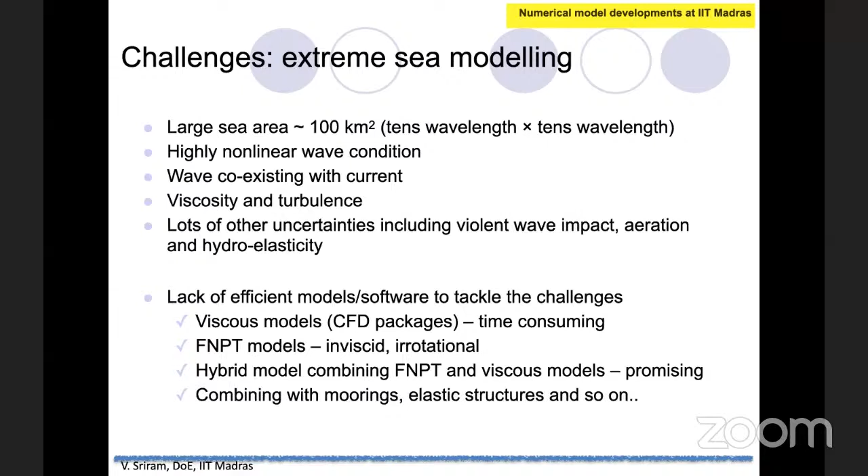In this entire talk, we will try to cover the last three parts: the FNPT model, the hybrid model, and the coupling with mooring line tension as well as elastic structure interaction. So in general, when we talk about fully nonlinear waves and violent wave and structure interaction, we have different classes of numerical models.

Depending upon the method, we call this a mesh-based method or a mesh-free method. Mesh-free methods are recently quite popular for modeling the wave structure interaction process. In the potential flow solver, traditionally people have used boundary element method, and we can also use finite element method.

One important thing in a numerical tool, whenever you try to develop it, is it has to handle both small waves as well as steep waves, because most commercial code may not be able to handle small waves in the wave structure interaction process, because there will be a lot of damping and numerical dissipation and so on and so forth.

It also has to capture the splash up or plunging of the waves along with the structure interaction, whether the structure is rigid or a floating rigid structure, or elastic structure interaction.

More importantly, for industry perspective—because after my PhD I worked in industry—when we tried to do it there, they need it to be computationally efficient as well as faster. The simulation has to take very less computational time. So that is one thing we have to look into whenever we want a numerical tool.

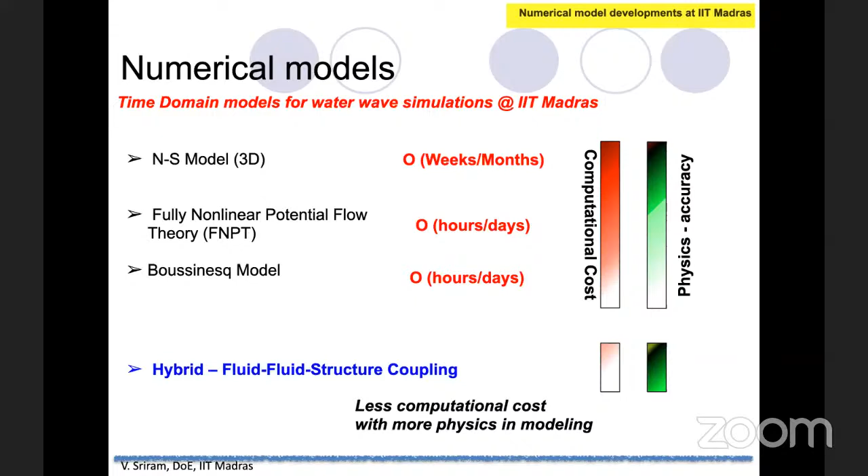In this slide, I'm not going to go into the equations part of it. As I told you in the beginning, I will just try to show the application of the developed model for the different approaches which we have developed.

The first one I will show is the mesh-free method. So what is a mesh-free method? People might know about finite element or finite difference, which are mesh-based methods, whereas mesh-free means we are basically trying to deal only with nodes or particles—there is no need of any mesh. So is it a new thing? No, it's not new.

It basically exists ever since the Taylor series exists. So the advantage of this mesh-free method is it has...

Because the finite element or finite volume method needs a high cost in creating the mesh, as well as automatic meshing when you want to do a dynamic mesh simulation. It also has low accuracy of the stresses, because the derivative term will be less accurate in the case of finite element, and there will be discontinuities at the element. So these are all the issues in the mesh-based methods.

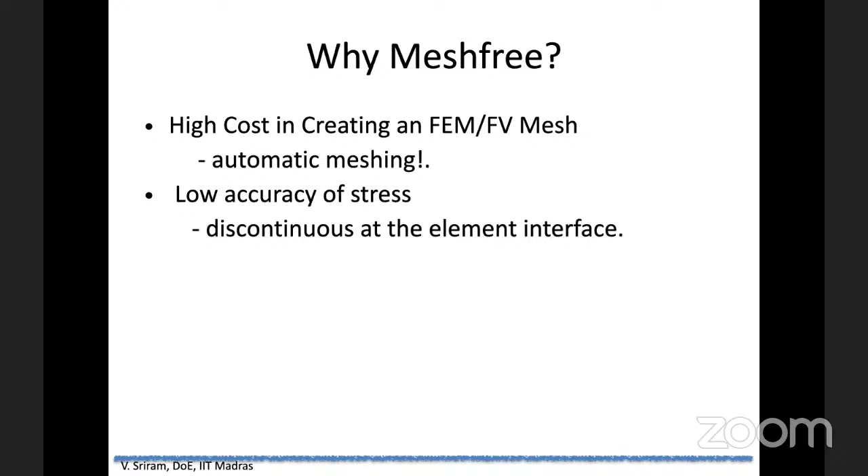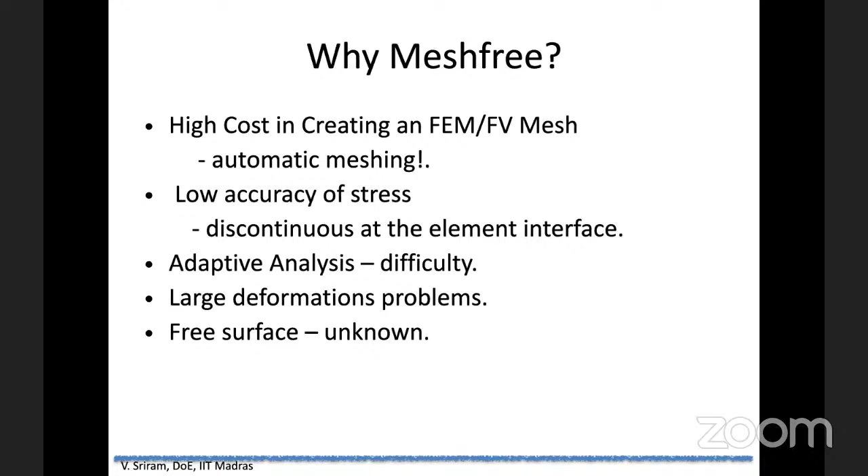And of course, adapting to the dynamic mesh as well as the time stepping is challenging in the case of mesh-based methods. And if you want to deal with a very large deformation problem, again, the mesh has to be properly refined. One of the major issues, in particular in ocean engineering, is the free surface, which is unknown - we have to find the free surface during the simulation itself.

So what is this mesh-free method? What is this particle-based method? This is the only slide which I have the equations, but what is this particle-based method? The particle-based method exists ever since the Taylor series expansion exists.

But the issue is, if you might have used the one-dimensional Taylor series - you might have studied this in higher secondary school itself - you basically get the forward difference or backward difference and so on by using the Taylor series. But one of the constraints in a one-dimensional Taylor series is the path. That means it has to go in only one direction.

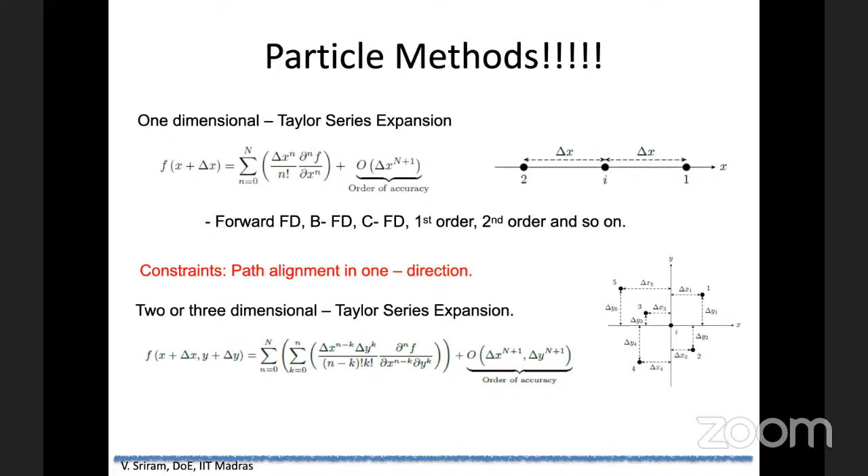But how about two-dimensional or three-dimensional Taylor series? Of course, yes, you can use a two-dimensional or three-dimensional Taylor series. The advantage with the two-dimensional, three-dimensional is, if you want to define a point, it's enough if you know the X, Y, and Z coordinate system. That means you don't need any mesh at all - you just need to know the X, Y, and Z coordinate system, and then you can solve this.

Suppose if you want 5 derivatives, you have to pick 5 points, and then you have 5 equations, and you can solve for the 5 unknowns. The advantage is it has no path constraint, but the disadvantage is it needs more nodes for the cross derivative terms, and in particular it leads to an ill-conditioned matrix.

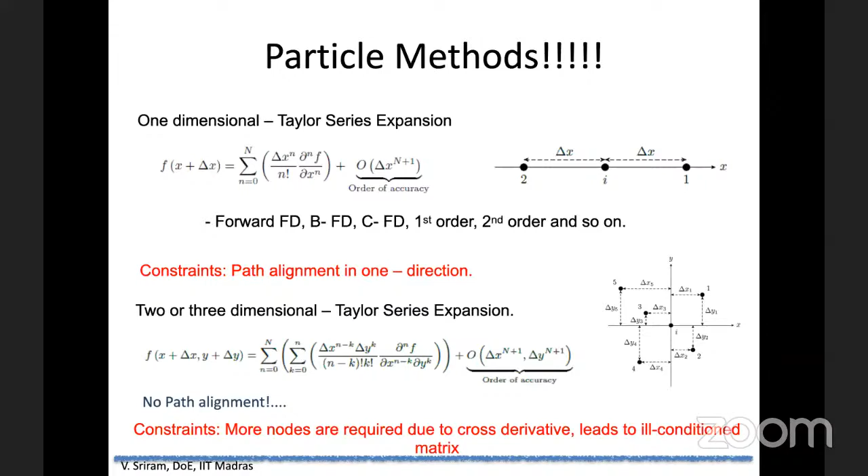That is the reason people, before 40 years, because the computation power was not that much, had not tried and improved these two-dimensional, three-dimensional Taylor series expansions. So nowadays, in the last 2 decades, because of computational power, people try to improve upon this method, which leads to the particle-based method. So most of the particle-based methods which exist as of now can be derived, or re-derived, just by using a Taylor series expansion.

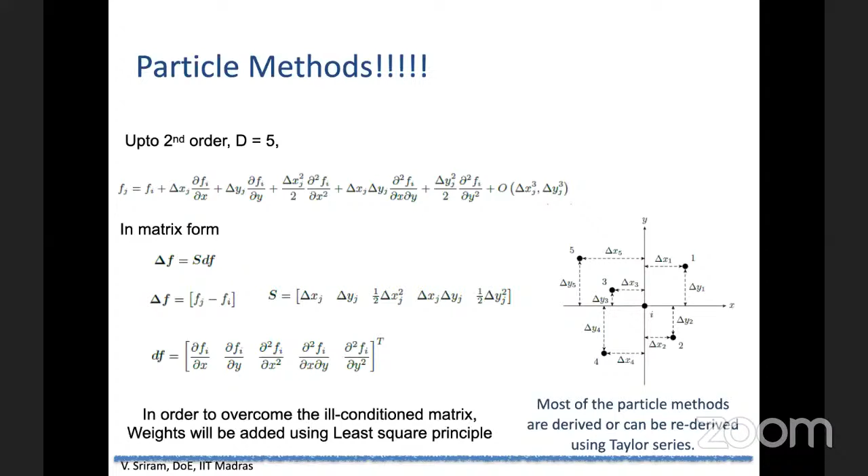So that is all about the particle-based method. Why is there a mesh-free method? Because the two-dimensional Taylor series itself is a mesh-free scheme. So the one scheme which we are trying to work on for the last 15 years is the meshless local Petrov-Galerkin method.

If you are familiar with finite element, you might have heard about the Galerkin scheme. The Petrov-Galerkin, in the sense, both the test and trial function will be in different functional spaces. And the local means we are trying to deal with the local subdomain instead of trying to do the entire global domain. And meshless, in the sense, there is no need of any mesh in this particular method.

There is an improvement which we have made in this particular meshless local Petrov-Galerkin scheme, for the velocity as well as for updating the coordinate system. This has been developed for the past 15 years, and we have applied it to a wide variety of problems. Recently we came up with a review paper on this particular MLPG, particularly the developments and its applications in the ocean engineering context.

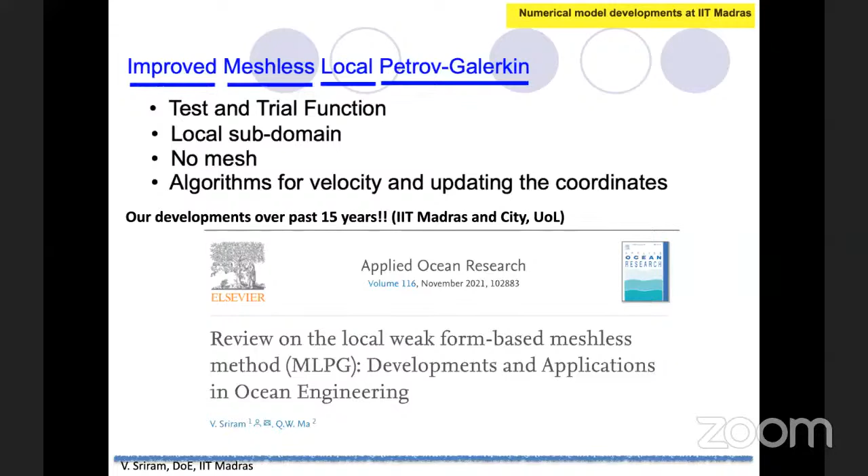Wherein we detail each and every algorithm, and discuss the pros and cons of these algorithms, and compare it with the traditional smoothed particle hydrodynamics, which is another class of particle-based method. I'm not going to deal with any of the equations because of the audience - I will just try to focus on the application of it. So we try to develop this particle-based method. Some of the applications which we have applied this model to is the sloshing problem.

It's a two-dimensional tank, as well as for the wave overtopping on a structure or the wave breaking on a simple slope. So this is for typical two-dimensional test cases that people normally do whenever they try to develop any numerical scheme. And we also extended this two-dimensional model for wave breaking interaction with

wave breaking interaction with the elastic plate. So whenever there is a plate, a vertical wall or such, it is going to have an impact, and then the plate is going to vibrate. So this entire process has been captured by using a

two-dimensional model, wherein we have particles which are coming and hitting an elastic membrane, and the elastic membrane is going to bend. So you have to solve the elastic structure interaction, the traditional Euler-Bernoulli equation based on finite element, as well as we solve the fluid based on the meshless local Petrov-Galerkin scheme.

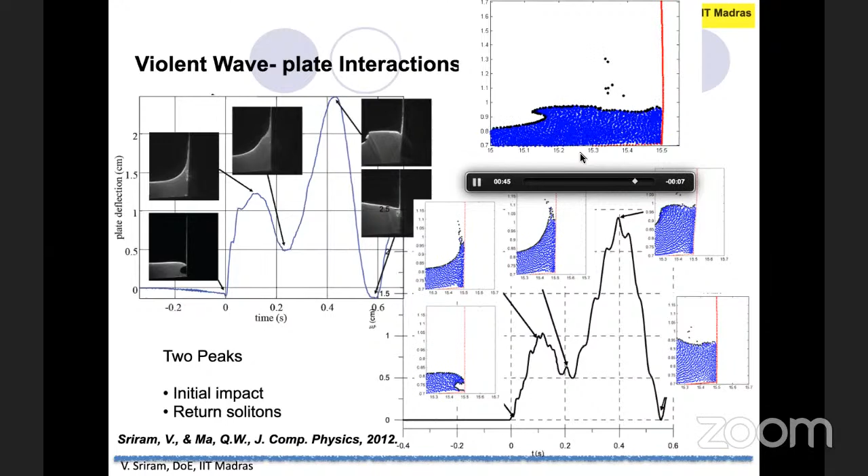And we try to understand how it basically compares with the experimental measurement. So we had a comparison with the experiments as well as the numerical model. The one which is on the left-hand side is an experiment, and the one which is on the right-hand side is a numerical comparison between the two things. And this is for two-dimensional. So first I will just show the two-dimensional applications, then I will go to the three-dimensional application.

So another application which we considered is about the porous structure interaction. Normally for modeling any rubble mound breakwaters or stones, we consider it as a wave porous structure interaction. There are two ways of modeling. One is by using a microscopic approach.

That means you model each of the rigid bodies. So that is currently what we are working on, wherein the computation time will be very much expensive. And the other one is a macroscopic approach, wherein we try to model this porous medium also as a fluid, but by including the Darcy velocities and all those additional terms which come from the empirical formulas.

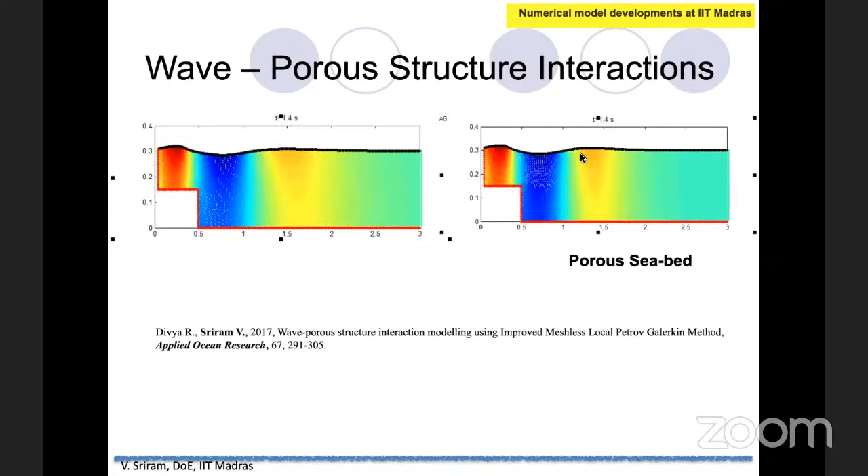So this is one of the applications wherein we extended it to the wave porous structure interaction, as well as we extended it to the wave vegetation interaction, which is one of the recent approaches due to climate change adaptation, for how to protect the coast based on vegetation. So we extended it for two-dimensional. Of course, we do have a three-dimensional model for the same thing, showing how the vegetation is going to influence the damping characteristics of it. So this is another application of this particle-based method.

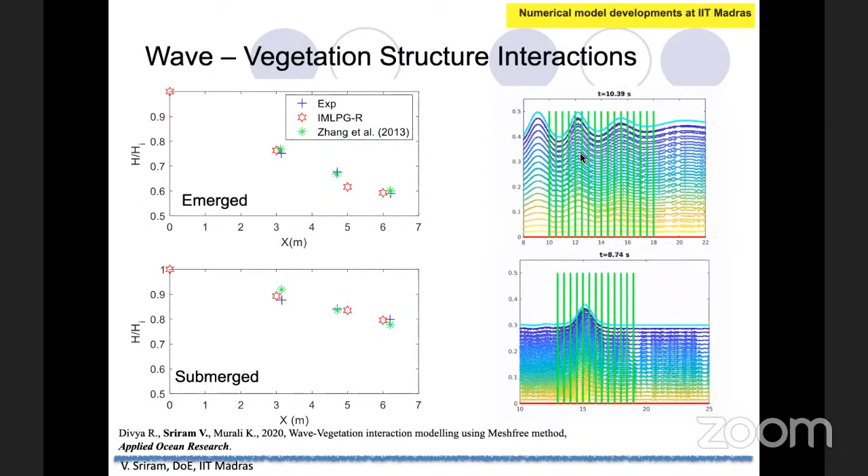And then, of course, we applied it to floating bodies, typical monohull as well as twin hull. This is for forced motion, and we tried to use the particle-based method. One of the issues with the particle-based method is that it cannot handle variable resolution like in a mesh-based scheme, because of the algorithms which we use.

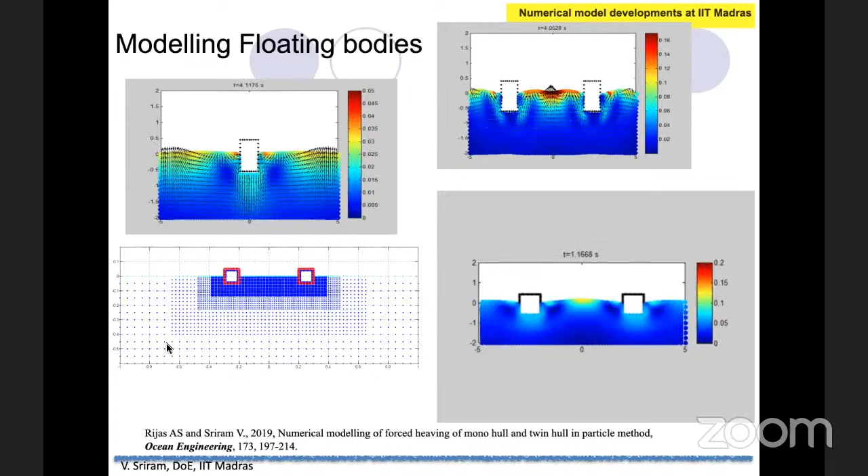So in recent years, we tried to improve upon this particular algorithm so that you can adapt it for a gradient mesh, like in mesh-based schemes. So that is one of the advantages which we have recently focused on when modeling floating bodies. And the advantage with this is we can reduce the computational time drastically.

Of course, everybody knows that near the body, we will try to have a finer mesh resolution, and far away from the body, we will try to have a coarser mesh resolution. Then you can reduce the computational time as well as the number of nodes required to capture the particular physics involved in it.

And then, of course, we applied it for a simple free decay test as well as for a roll motion of a box, wherein some traditional experiments are available to compare with the test cases. And then we also applied it for a floating body response, this is for two-dimensional, and then I will show you the three-dimensional in the coming slides.

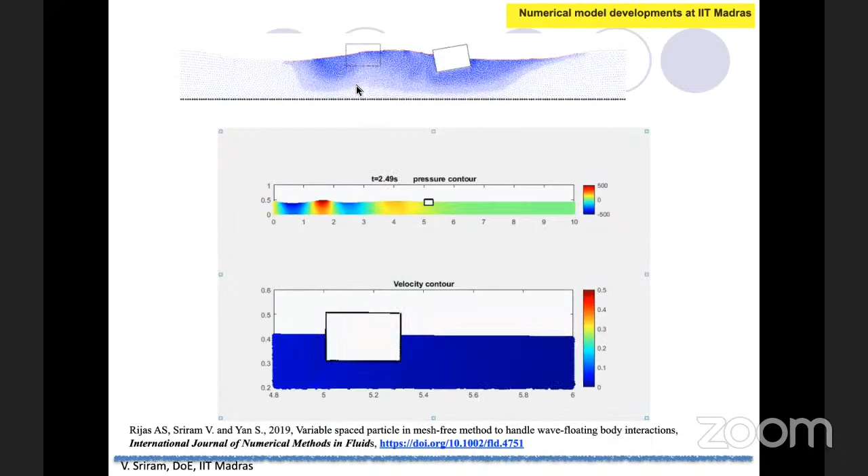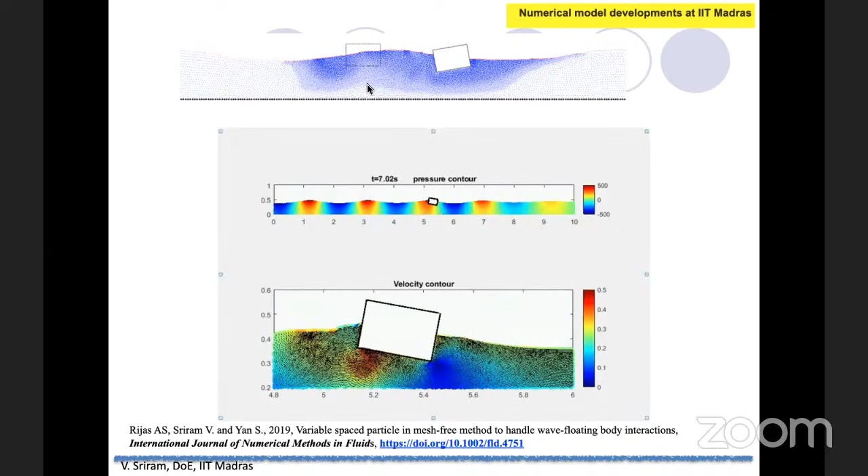One of the advantages is we can have very adaptive particles, as well as we can also have green water loading if you are interested in that. That is easy to handle in the case of a particle-based method when compared to the mesh-based scheme, because of the advection term, which is not present in this Lagrangian-based formulation.

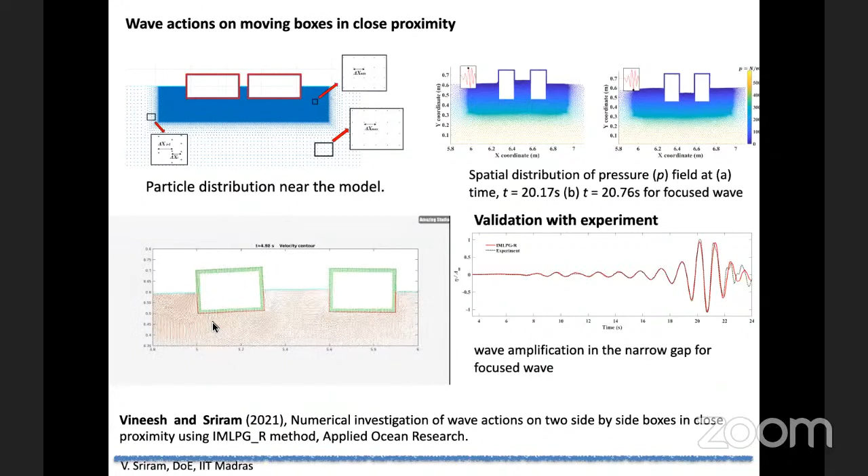And recently, we also did for two boxes, typical application for FPSO nearby the tankers, and how do they respond? What is the gap resonance between the two things? We did small experiments in the lab, and then we compared it with our numerical model for very steep cases. So these are some of the things which have already been published in journals.

And these previous ones are basically two-dimensional. Of course, two-dimensional cases are not of practical importance. It's mostly of academic interest, as well as for testing the numerical schemes which are adopted. And the most important one for practical application is the three-dimensional modeling.

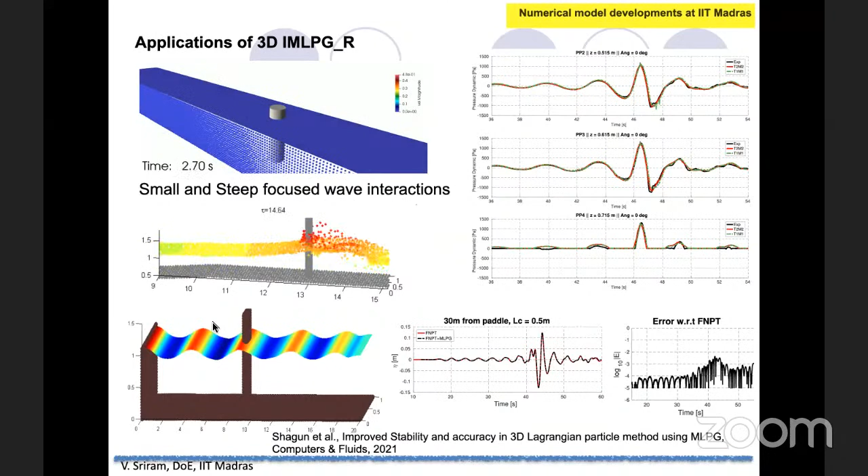So, of course, we extended our particle-based method for three-dimensional modeling. But one of the issues is the computational time in these modelings. So I will come back to how we address this computational time in the later part of the slides.

So this is a typical application for a fixed structure as well as for a floating structure, or for a heaving cylinder. You can apply it, and this is a comparison with experiments for a simple 3D boards. And this is for the two-dimensional one, which is based on mesh-free methods based on the Navier-Stokes model.

And I will just show you the mesh-based method which has been developed. This is recently we developed this particular model, which is of course open source. We released it to the public. Anyone can use it. This RANS 3D has a lot of capability. It is based on the two-phase flow model, and the previous one which I showed is basically a single-phase modeling.

And we try to optimize it when compared to the traditional commercial package by using hybridization with the potential flow solver. I will talk about that in the coming slide.

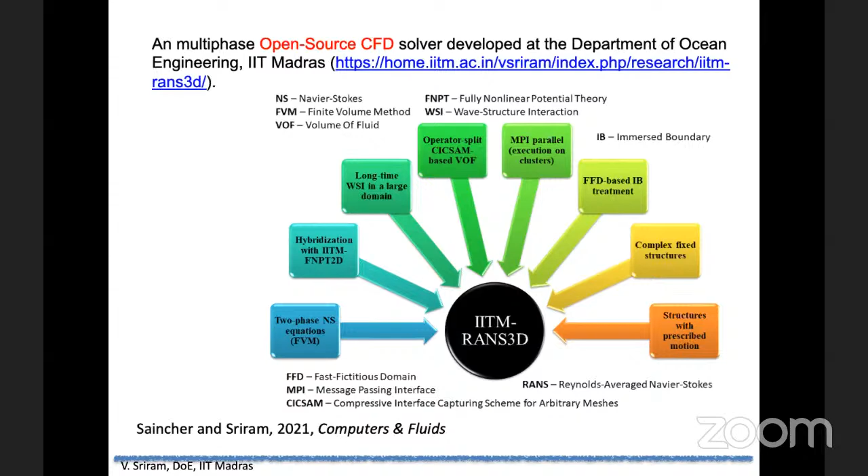As well as you can use this model for a long duration, and for a long time. And then we developed a lot of different schemes for the VOF part of it.

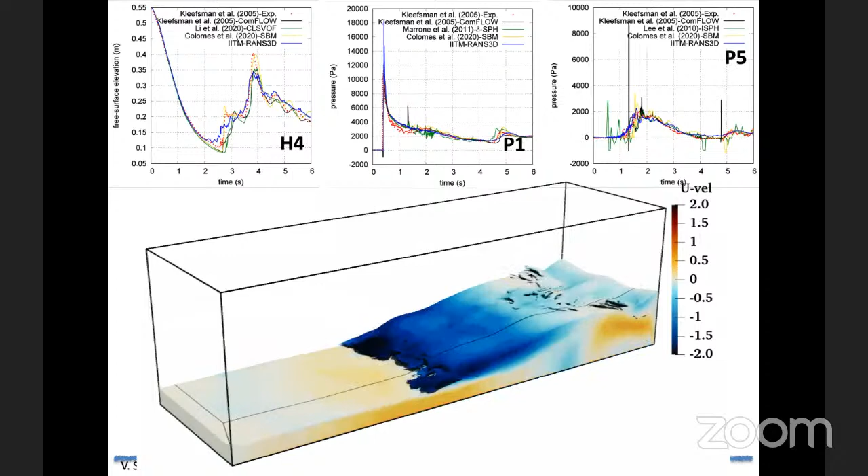And this is a traditional test case wherein you try to do a dam break impact on a simple structure, and then you try to validate with the experimental measurement and show whether your free surface tracking scheme or your volume of fluid schemes are working better. So this is a typical application of it.

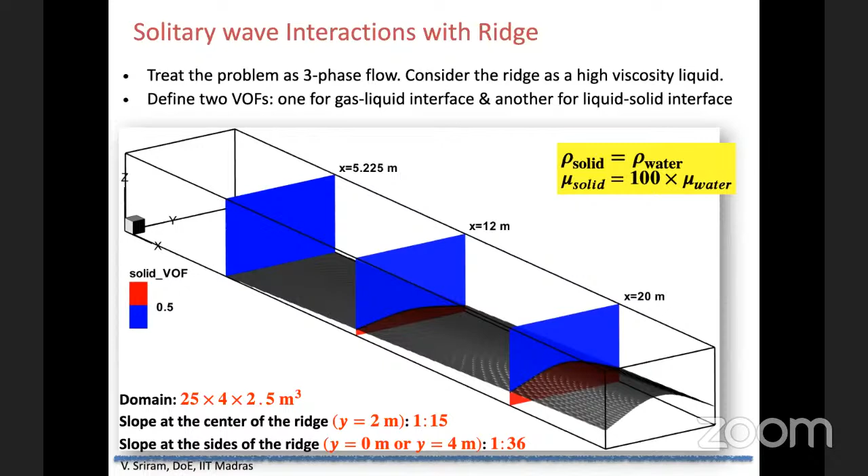And then we also try to do some of the three-dimensional solitary wave breaking on the slope, wherein we also develop the conservative form of the solver as well as a non-conservative form of the solver to handle the breaking jet properly. Because in most of the non-conservative solvers, we can't handle the breaking jet properly. So we want to understand the breaking jet characteristics with the turbulence very properly. So we move to a conservative solver.

And this version of the conservative solver will be released. It will be released in a month's time.

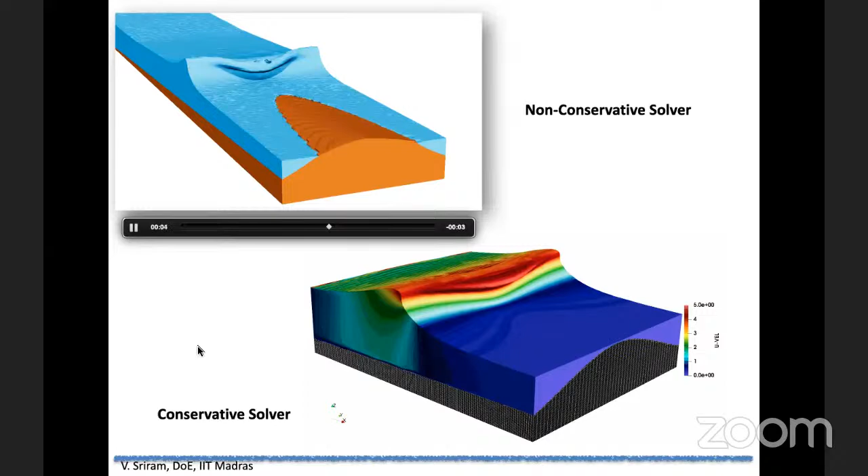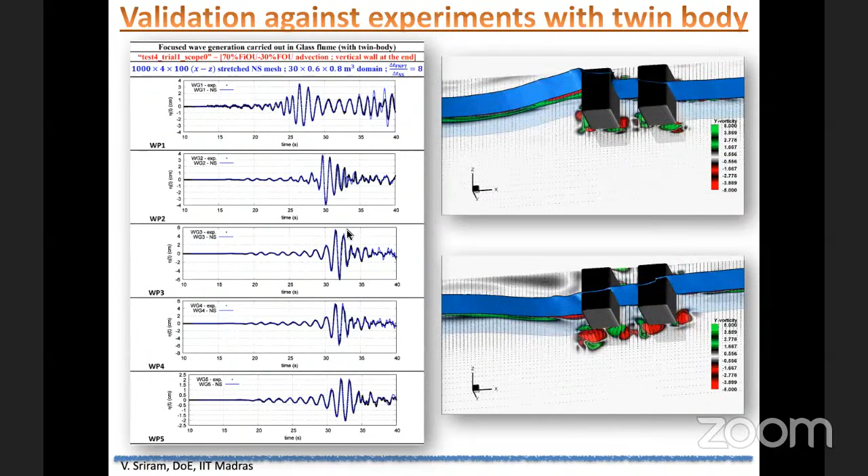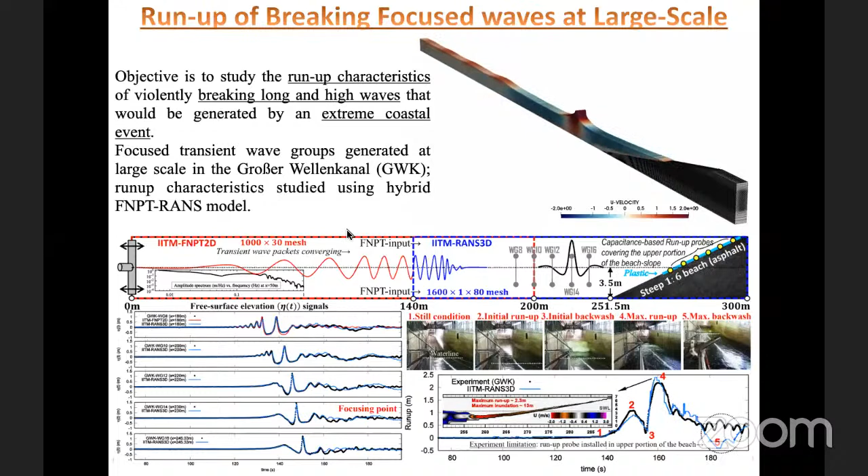And of course, this is one of the projects which will be funded by NRB. Recently, they have just sanctioned this particular application. So far, we have applied it to offshore and coastal engineering. So we want to apply it to the naval architecture problem.

So recently, we want to apply this RANS 3D solver for naval architecture applications, particularly for ship resistance as well as for the forward motion of the ship.

So we have the present model, the RANS 3D, which is based on the embedded mesh. So you really don't need to have a very difficult time in creating a complex mesh. It comes up with it because we are trying to fine tune it for different, particularly based on the offset tables, particularly addressed to the naval architecture applications. And the second class of the problem is fully nonlinear potential flow theory.

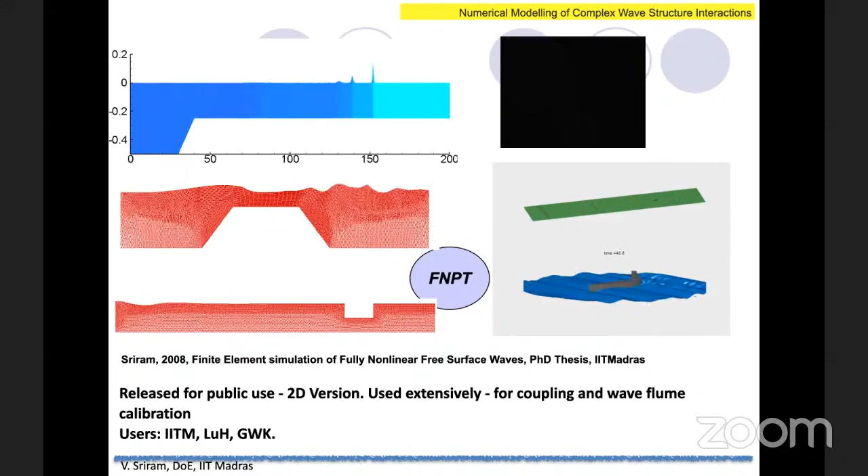This potential flow theory is something we have been working on; it's my PhD topic. This version of the 2D code has been in public use, and many of my colleagues abroad are using it for their applications when testing in facilities. We will be coupling this potential flow solver with the Boussinesq model, which I'm going to talk about, together with the Navier-Stokes model—that is our hybrid modeling.

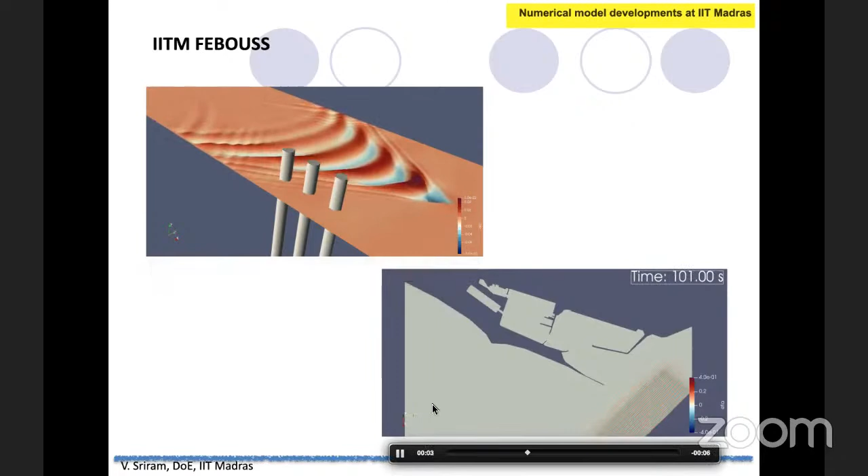The Boussinesq model is basically a finite element depth-averaged model. We can model large domains like the Chennai port, and so on. But one interesting effect is ship wakes on the banks.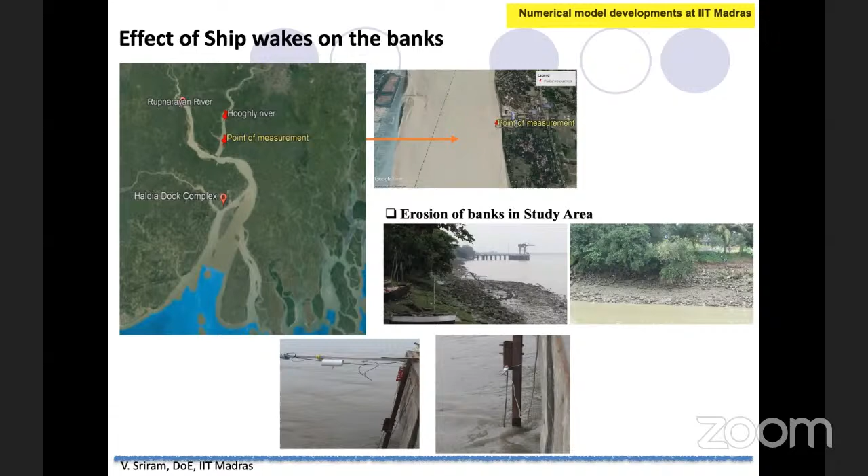Whenever there is a narrow channel and a ship moving through it, there is going to be bank erosion. This is one of the problems in the Hooghly River. We did some measurements and wanted to develop a numerical model to address this particular problem. But of course, using CFD for this is not feasible.

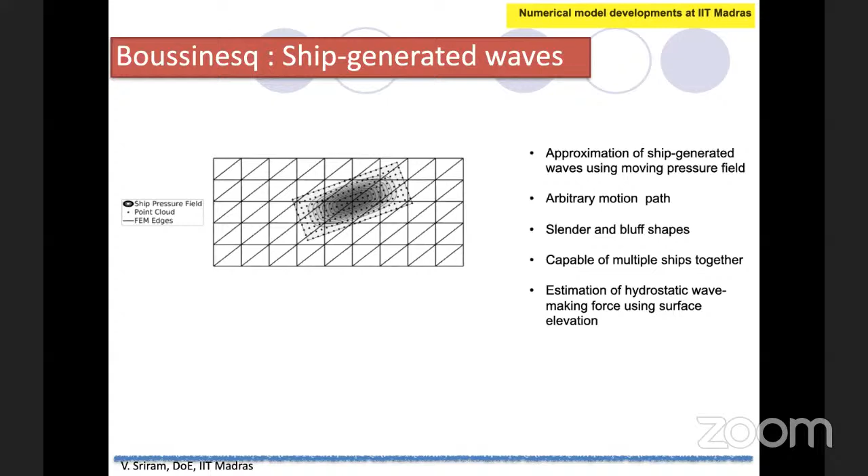So we developed this finite element based Boussinesq model, wherein we can approximately generate ship-generated wakes by using a moving pressure field. It can handle both slender and bluff shapes of ship bodies, and it can also handle arbitrary motion. Of course, you can't get exact resistance or wave-making resistance like in a CFD code, but it is approximate, mostly based on the hydrostatic part of it.

This is a typical ship moving pressure that is moved in constant water depth, and we want to validate this. Of course, validation is a tedious part.

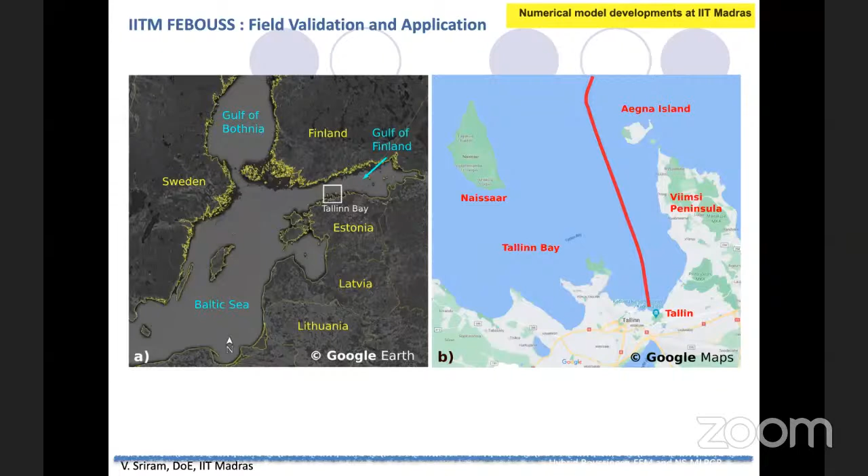One of my colleagues did field experiments in the Baltic Sea, in the Tallinn Bay, where a ship moved from one end to the other. They measured the ship path as well as the entire bathymetry, and they had wave gauge readings near the island.

This is mostly a calm sea area, so there are no waves; most of the waves are generated by the ship wakes from the fast ferry. We ran these simulations using our developed model for the ship wakes, and then we compared our model with the field measurements.

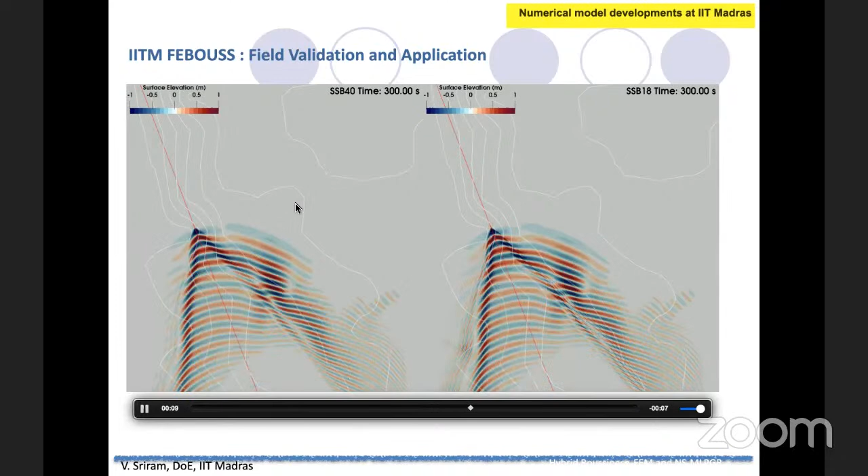This is the field measurement time history, along with our model, and some existing models available as open source. We could capture it very well—particularly for field measurements, we could even capture the high frequencies, all the types of frequencies that exist, captured by our numerical model.

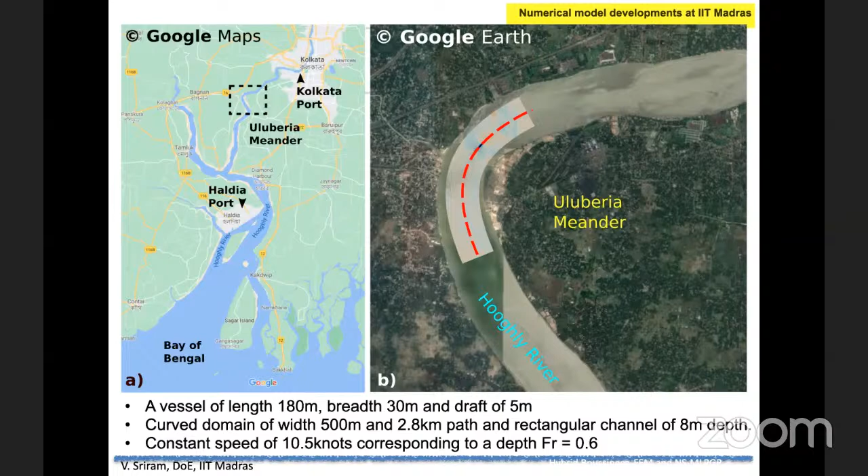Then we wanted to compare with existing models. One advantage of our model is that we can handle a curved path, which is challenging for other finite element or finite difference based Boussinesq-type models currently available as open source.

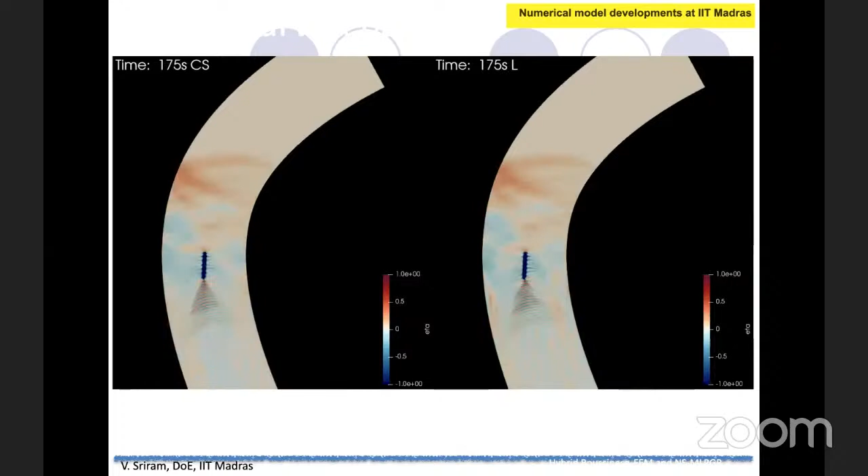We developed different schemes to handle these curved paths when the ship moves in a curved domain, and how the wakes affect the banks. Using a traditional sediment transport formula, we can calculate the rate of sediment transport and how the bank is going to erode.

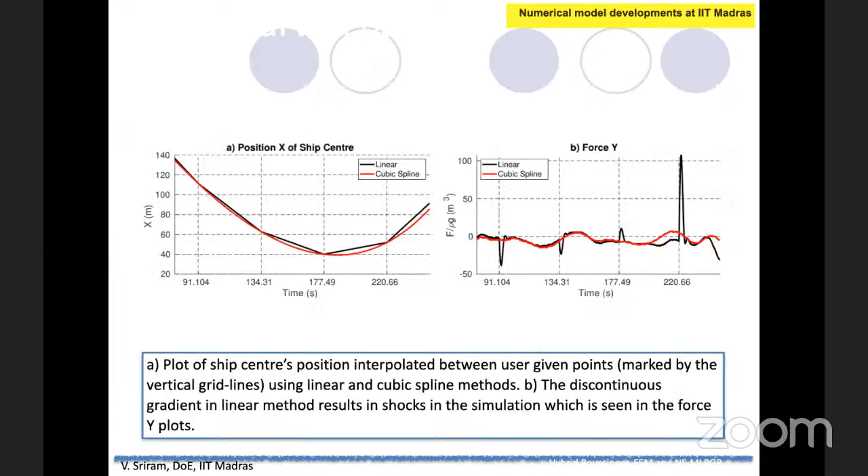We are in the process of comparing it with field measurements as of now. And the last part is the hybrid modeling.

One typical application of hybrid modeling: I want to model a very big domain, and I'm also interested in the viscous characteristics near a small modeling region. One advantage is you have the potential flow model in the far field.

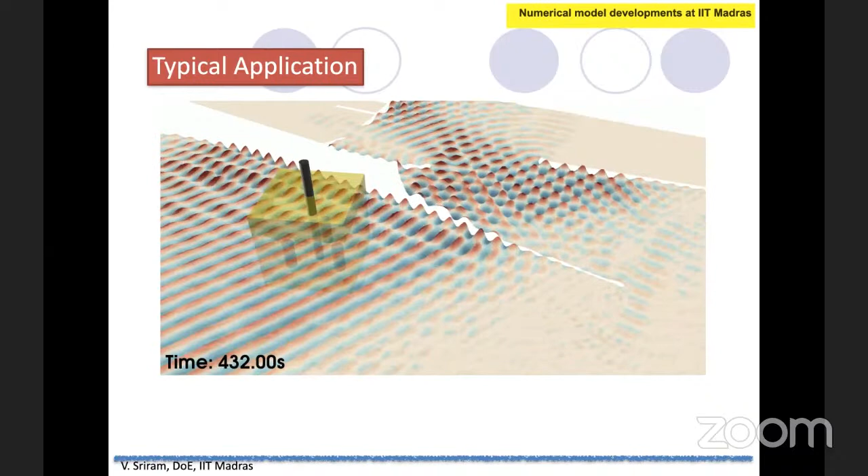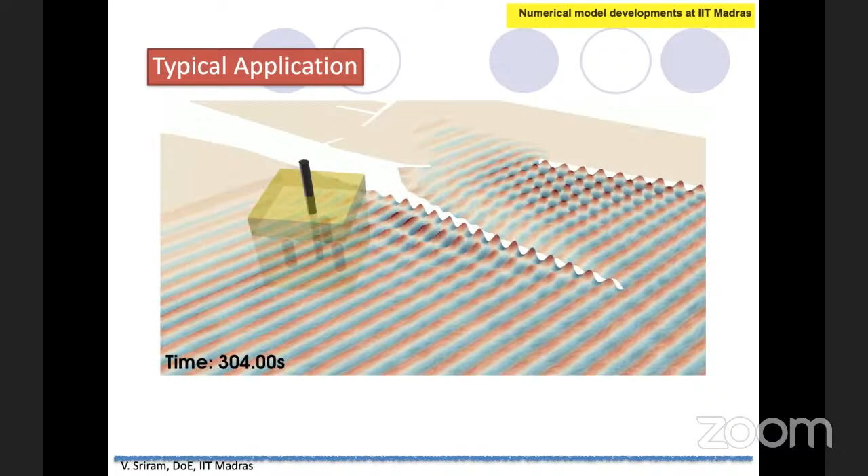You want to study the near shore, just the viscous effects near the structure, or when there is a ship moving around it. In those cases, we use the Navier-Stokes solver which has been developed, as well as a potential flow solver. This means you need hands-on experience in both solvers in order to couple them.

So that is how we can reduce the computational time. One is, of course, you put it in the GPU with clusters of mega servers and do it. That's what normally people do.

The second one is based on physical-based approximation. We have potential flow models, different types of potential flow models, and we have different types of Navier-Stokes models, and we want to couple these two models together. The red ones are basically the models developed at IIT Madras. To be frank, I am not using any open source or commercial solvers. All the solvers have been developed in-house at IIT Madras, and we want to couple these two solvers to get the advantage and overcome the disadvantage of both methods, to make it a unique one.

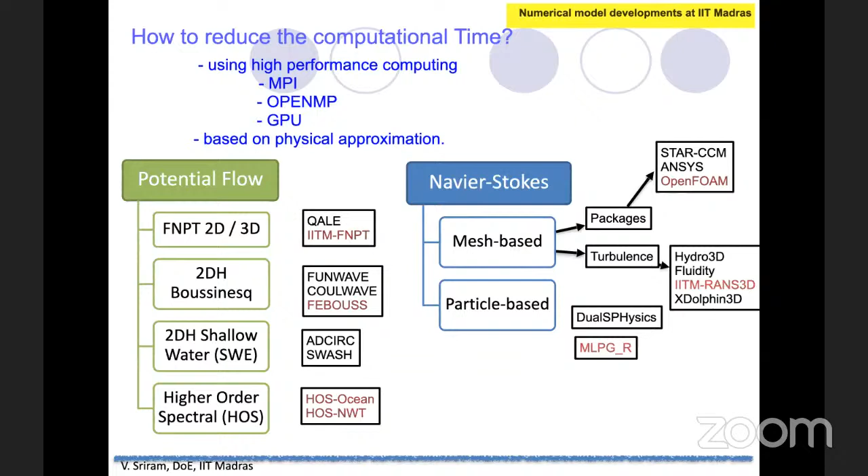There are different types of coupling available in the open literature. We have discussed a lot of different approaches. One is based on domain decomposition, meaning you divide the domain into different parts and handle it either by passing information from one solver to the other, or you try to do a functional decomposition, meaning you try to separate the irrotational as well as the rotational flow characteristics together. And then whether we can handle it with structures as well as without structures.

At IIT Madras, we are developing in both trees. That means we have a domain decomposition based approach as well as a functional decomposition approach. The advantage of the functional decomposition approach is that it is computationally very cheap in solving your Navier-Stokes solver, whereas in the case of domain decomposition, you have to solve the Navier-Stokes solver as such.

Initially we tried to develop this two-way coupling, because that is the challenging one. That means you have to transfer information from a potential flow theory to a Navier-Stokes solver, both in space as well as in time. So we developed different schemes to address this particular approach.

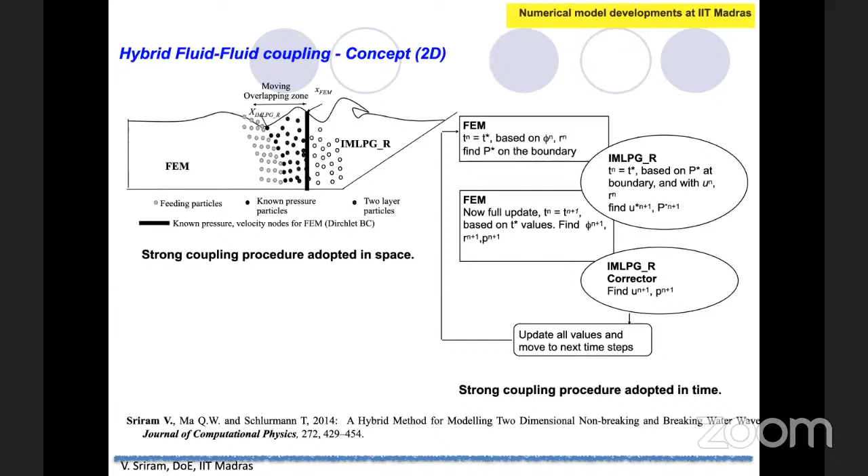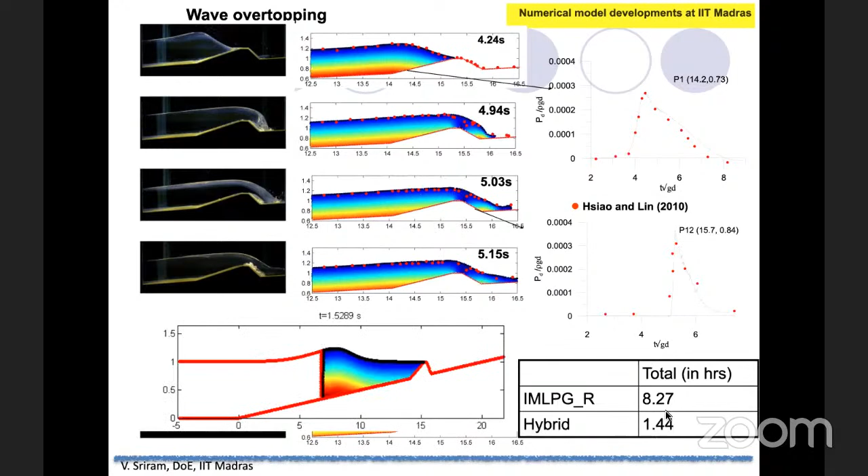Later on, again for the 2D approach, we tried to couple it with the elastic solver, wherein we have a potential flow domain in the far field and a Navier-Stokes domain near the field. There is a seamless coupling between the two solvers, which then interacts with the elastic structure. Okay, so all these are 2D. I will show you the 3D in a short while.

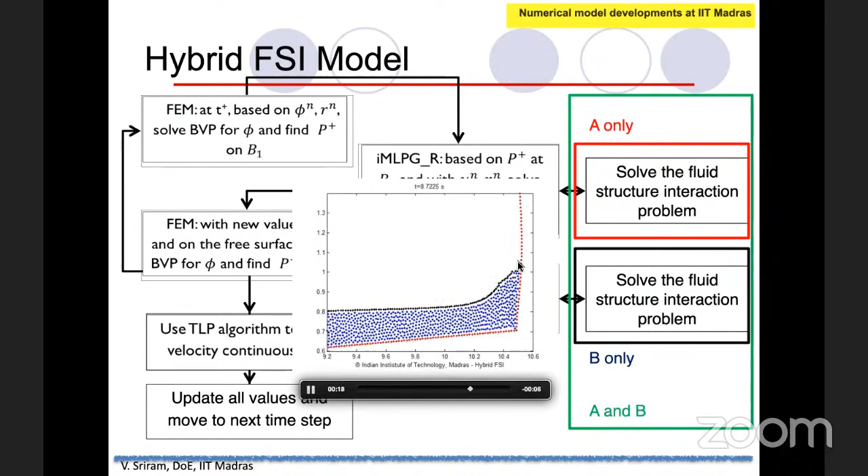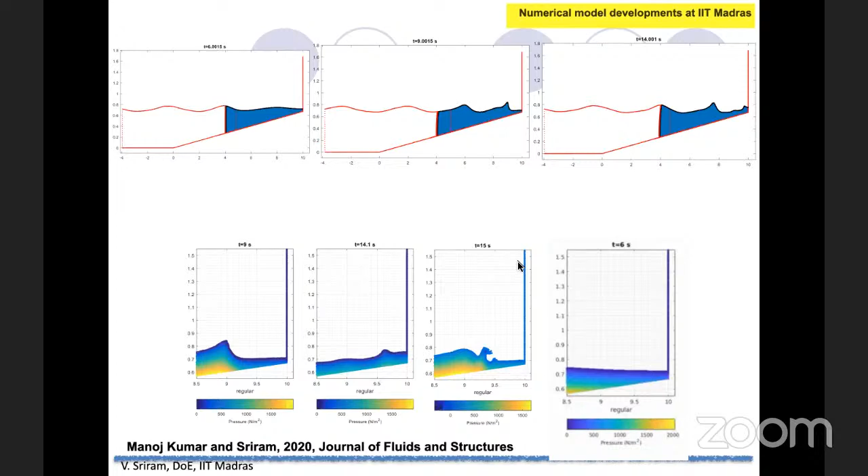These are different approaches wherein we first test it for a two-dimensional problem, which is of academic interest as well as for testing our numerical schemes and approaches. And then we basically go for a three-dimensional approach.

So now coming back to the 3D hybrid model. The 3D hybrid model is challenging. One of these problems is the cylinder, a simple test case which we released at ISOPE, one of the international conferences, wherein I headed the comparative study session, and we released the data to the open public.

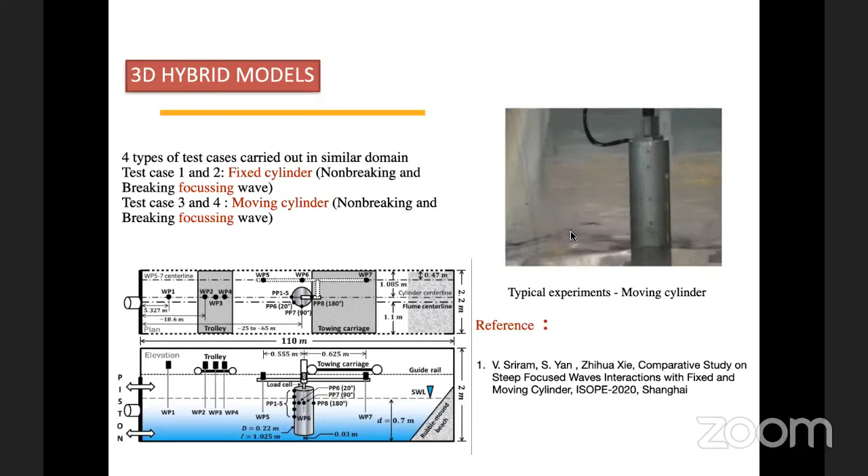We asked people from different parts of the world to participate in the comparative study. We did 2 different cases: one with the fixed cylinder, another with the moving cylinder case. The moving cylinder is basically a forward speed problem with incoming waves. This is just an idealizing condition, but of course we are not doing a ship because that would be complex, so we wanted to start with a simple problem.

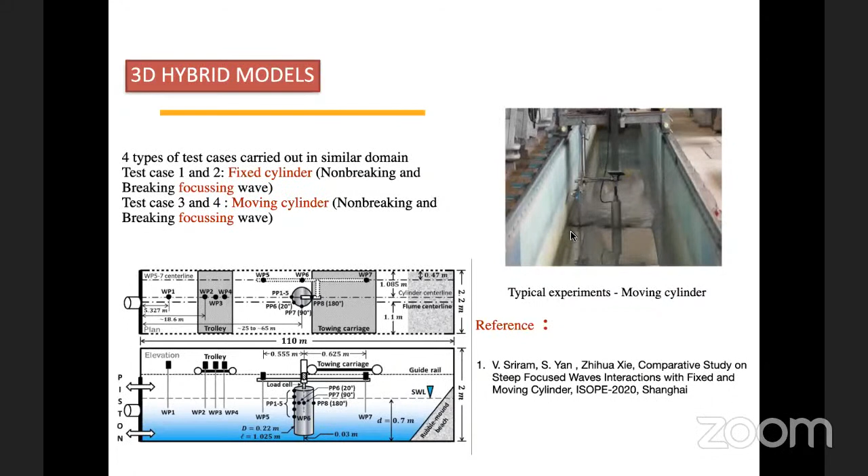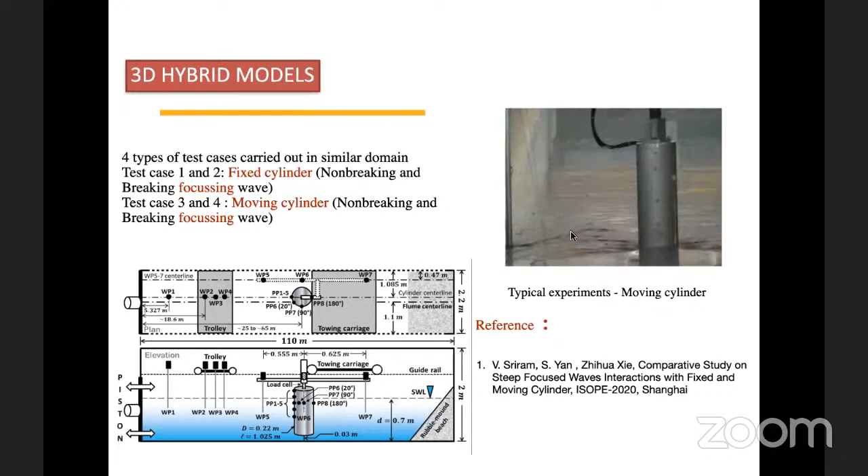So we released mostly the data for the non-breaking condition, because the breaking case is a challenging one and we don't want to complicate the problem. We released it for the non-breaking condition, and we received about 20 different participants who used various types of solvers, from commercial packages to in-house solvers to open source solvers. We tried to get that data and did a quantitative analysis between the different solvers, and we tried to see... we don't want to say which solver is the best one.

Rather, we want to understand how the solvers are comparing with each other as well as with the experiments. This is one of the ways wherein we can see how our own solvers compare with the rest of the solvers, which are available both from commercial packages as well as from in-house solvers.

We published a 2-part paper wherein we presented the guidelines as well as some recommendations on how to do it. Most people actually use a hybrid model. Whenever they use in-house code, they basically use a hybrid model. Whenever you use a commercial package like STAR-CCM+, they use dynamic meshing, that is an overset grid, and so on and so forth.

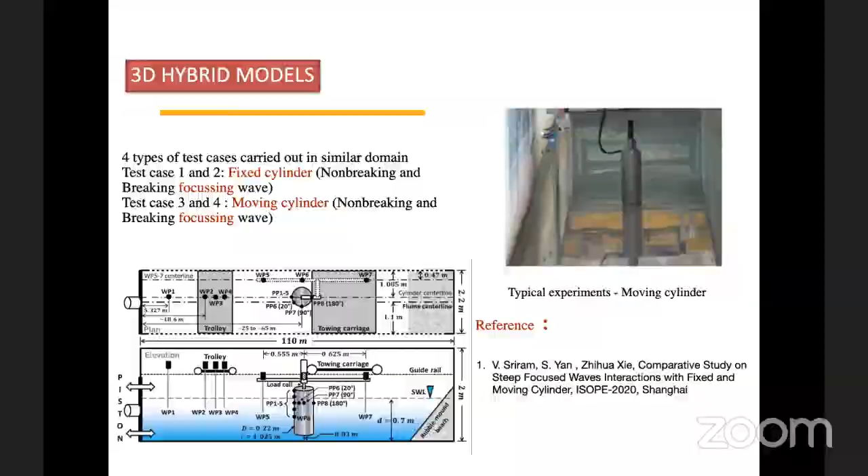Now one of the issues with this particular hybrid numerical model is this cylinder is being towed in a towing carriage for a 50-meter distance, and then it is going to interact with a focused wave, which is focusing at that particular location. So initially it will be only current, a simple current generation, and then it is going to have a current plus waves interaction. We wanted to test how these are going to behave - that was one of the challenges we posed to the researchers.

The other modeling which we proposed is based on potential flow with MLPG, and I'll show you the different other solvers also. There are different types of coupling, whether you do it in one side, or in 2 sides, or in 4 sides. That means you are trying to reduce the domain, the computational domain for the Navier-Stokes solver, or you try to do a cylindrical domain.

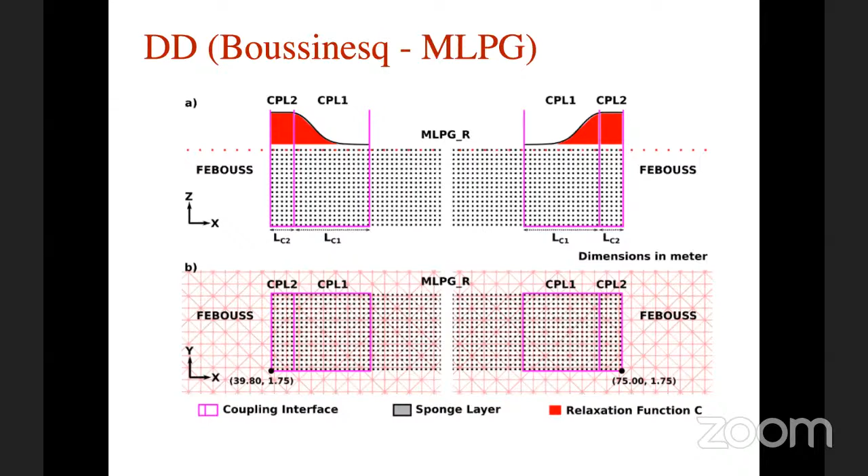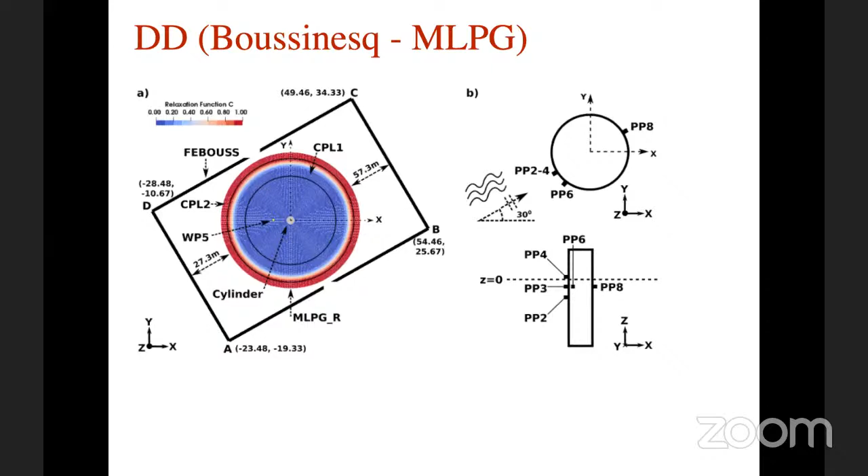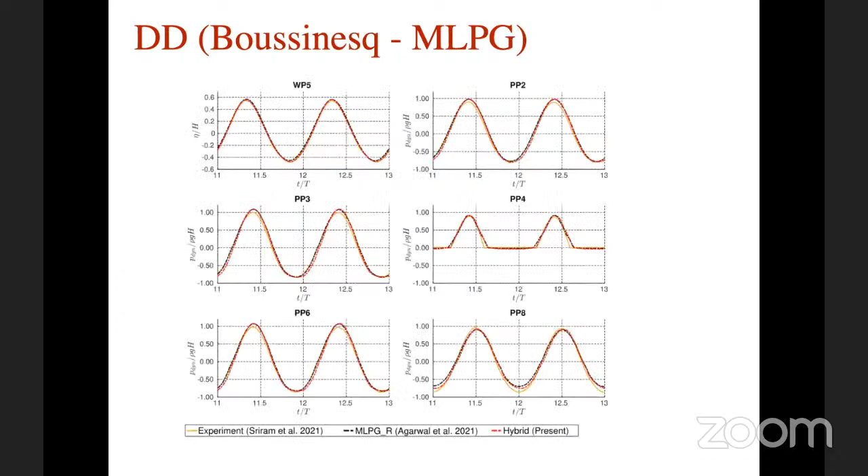So that means you just have a Boussinesq mesh, that is a finite element mesh, a potential flow solver on the far field, and then you have only the Navier-Stokes solver near the structure. This is a typical setup wherein you have a cylinder in the center, a cylindrical Navier-Stokes computational domain, and then a rectangular finite element domain based on a potential flow solver, or based on Boussinesq's model. For this particular application, it is based on the Boussinesq model. We try to derive the results from Boussinesq's to the MLPG - it's basically one-way coupling - and then we compared it with the experiments and so on.

This is how I skipped the animations - I just put this because animations were time consuming, so I just show only the JPEG image of it. It's basically a vertical cylinder. You can imagine even putting a ship, and then you can study only near the circular domain - there is no need of any reflection coming up from the boundary, because it is always getting information from the potential flow solver.

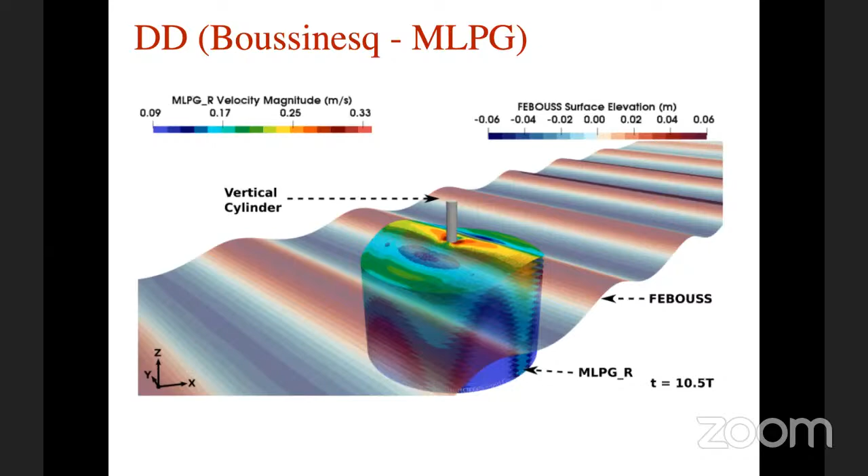The other approach which I mentioned is the SWENSE, that is a functional decomposition, one of the methods being developed by ECN, Ecole Centrale de Nantes. And this particular foamStar as well as the SWENSE solvers are OpenFOAM packages, developed in-house by BV, Bureau Veritas, as well as ECN. Through a collaboration with one of my students, Siddiq, we are trying to apply this for some of our applications, and incorporate some of our own concepts which have been developed in the OpenFOAM package. Of course, this is not open source as of now - it's only mostly used by BV.

One of the things is we wanted to establish the verification as well as the validation of this particular solver which has been developed - that was basically done by my student Siddiq.

It's based on a one-way domain decomposition, the one I told you about, as well as there's another option wherein we can use a functional decomposition. Functional decomposition means we subtract the Euler equation from the Navier-Stokes equation, so you get a complementary solution. You basically solve for the complementary flow field, and take the incident flow field from the potential flow solver.

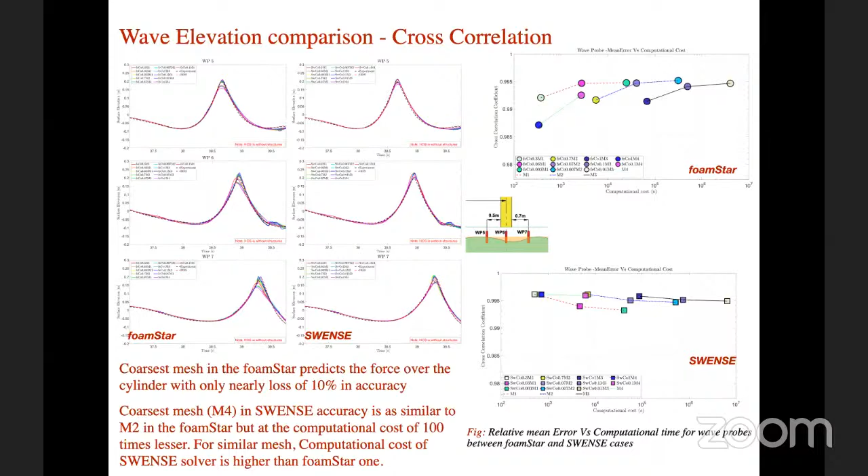The second approach we released for the comparative study is the moving cylinder, that is a moving structure interaction. So how do we model this? Of course, we can do it physically by moving it in a towing carriage, but how well can we move it computationally? There are different approaches.

One we call a two-way coupling, another we call a one-way coupling, and another is to fully solve the Navier-Stokes equation for the complete domain. Suppose the towing tank is 80 meters, you use the full towing tank of 80 meter length. But of course, this is going to take a lot of computational time, requiring a server costing 300 crores or so. That's what one other person did using Star-CCM+ in the comparative study.

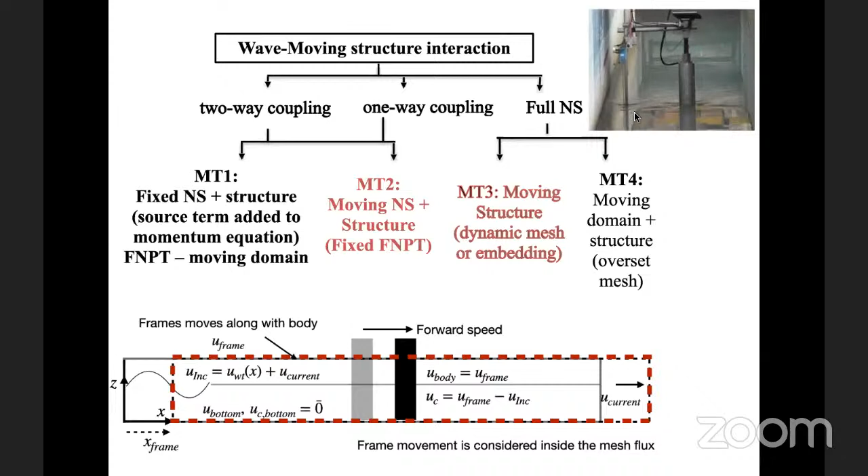The other one is like in a physical tank, you move the structure either using dynamic meshing based on overset grid, or using an embedded mesh. The first one is the one-way coupling, which we did based on foamStar, developed by BV, using both Navier-Stokes solvers, so the structure is moved in the same reference frame.

In the second approach, based on our IIT Madras 3D solver, we use a fast fictitious domain method, wherein we can move the cylinder. The mesh will not move, but the cylinder will also be considered as one of the solid phases, and that will be moved along with the structure.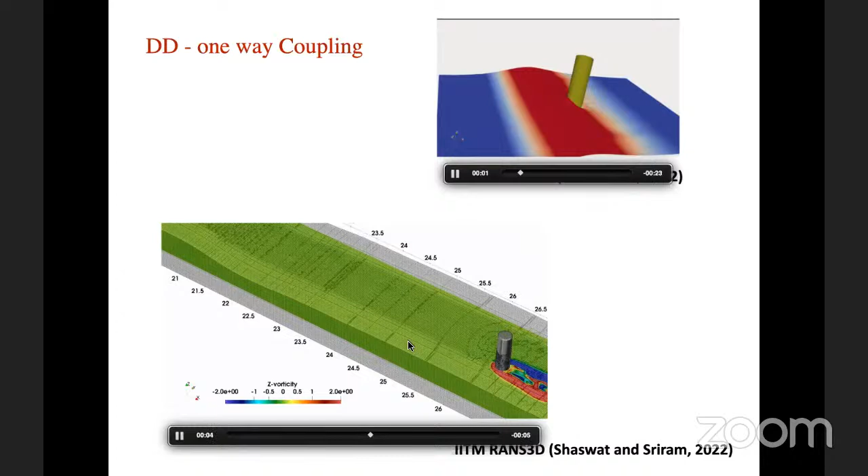I think there will be some delay because of the animations, I'm sorry about it. So these animations, you can see on my website.

This is one way of doing the domain decomposition based approach. The other one is modeling the realistic sea state with offshore wind farms, many offshore wind farms. That was one of the things. The idea is you'll have a potential flow solver throughout, and then different Navier-Stokes solvers, and try to do it that way. So that was our futuristic view.

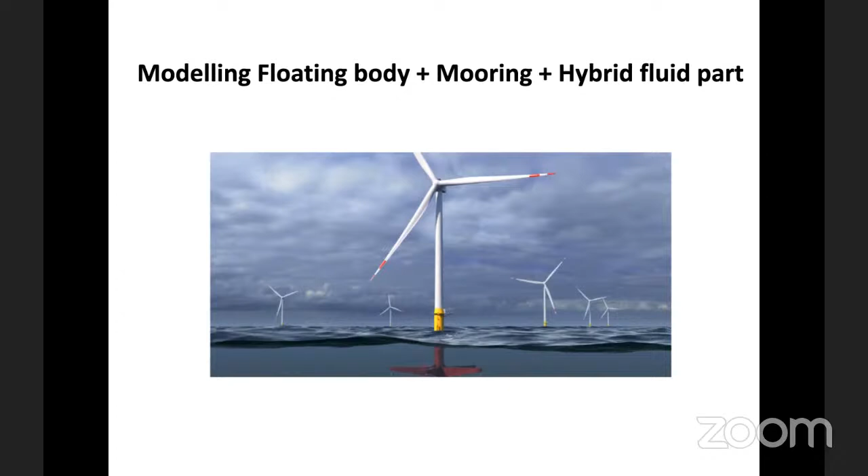In order to go about it, for a floating body we need mooring lines to be modeled. So what we did was use one of the open source solvers, MoorDyn, which is available. It has both dynamic and static mooring lines it can solve. So we coupled this MoorDyn with our potential flow and Navier-Stokes solvers.

This was done at each and every time instant: we solve the rigid body dynamics, we give the response to the mooring line, try to solve the mooring line, and then this mooring line result is fed back to the potential flow and Navier-Stokes solver, and it solves again. So it's basically all dynamically coupled, not done as an individual coupling, it's all put together in one particular tool.

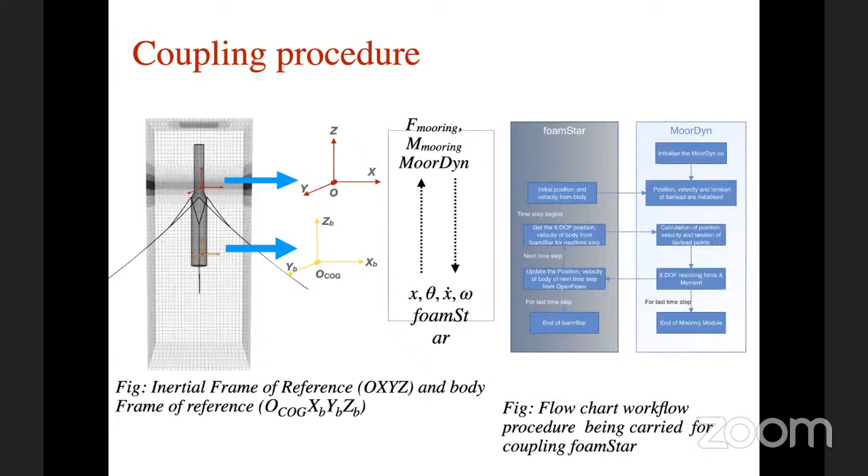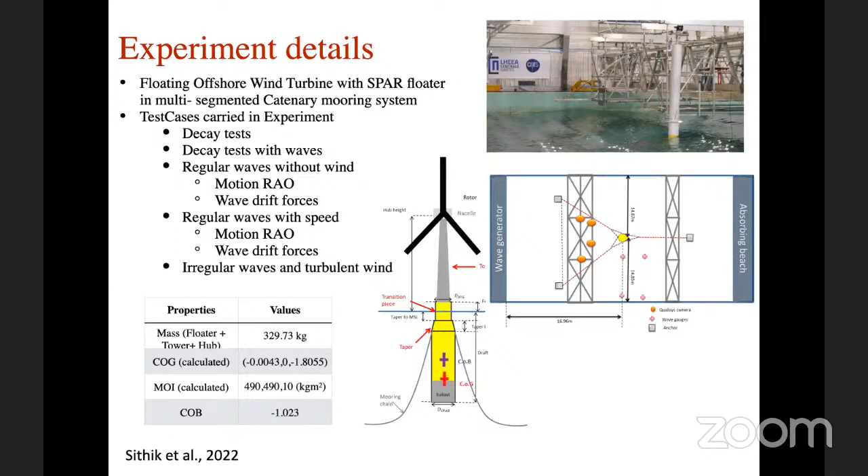For this, we took experiments conducted again at ECN, because it's part of a collaborative activity with ECN. They did tests for a floating spar with delta mooring. So we did the moored simulation, using a potential flow approach.

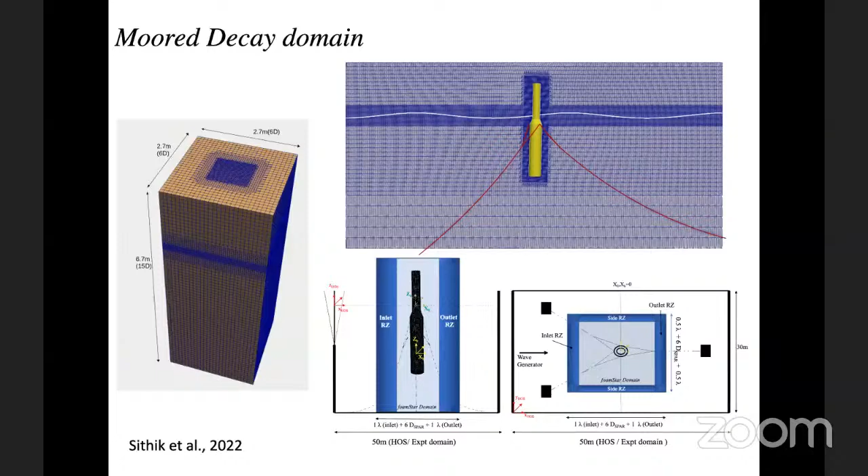It's a basin of 50 meters by 30 meters wide. We use a HOS, a higher order spectral method, that is a potential flow solver on the far field. And then we use a Navier-Stokes solver, that is foam star as well as Swens, near to the spar. And then the mooring line is also modeled based on the mooring. So all three are integrated together.

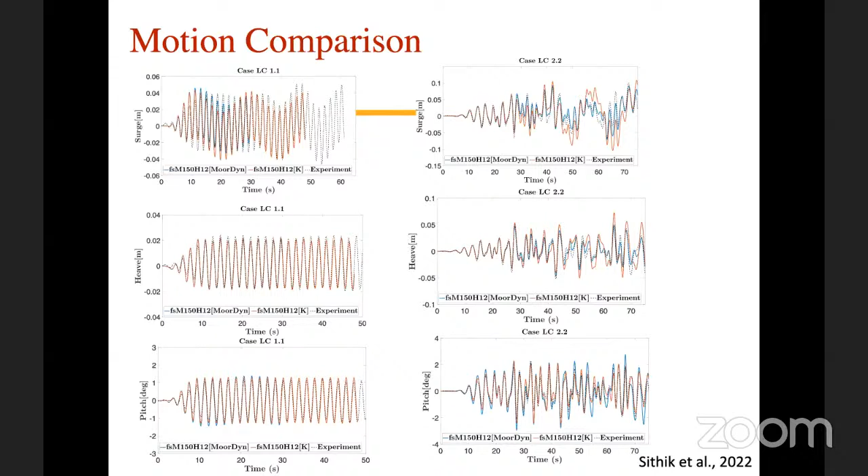We evaluated the performance of both the spectral functional decomposition approach as well as the full domain decomposition approach, based on Navier-Stokes as well as HOS method, because the colored one is basically the Navier-Stokes solver, and far away is all our potential flow solver.

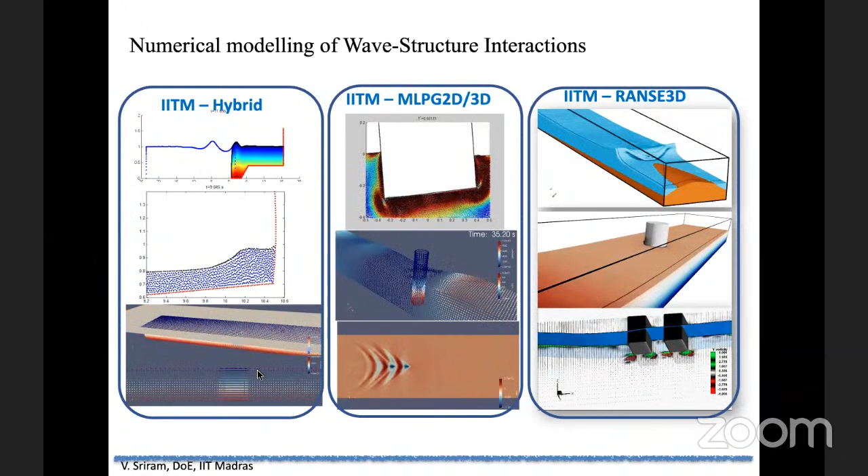So to summarize, we have different types of modeling approaches which we developed over the last 10 years or so, starting from particle-based methods to mesh-based methods, and coupling different approaches using a potential flow solver based on Boussinesq or based on the potential flow, fully nonlinear potential flow theory, based on finite element or based on the higher order spectral method.

For the last 5 minutes, one of the things we've noticed is that for most applications we need to validate the numerical model. Particularly in ocean engineering, we have to deal with large spatial domain as well as large time scale, as well as also deal with small spatial domain and small time scale - that is an impact problem.

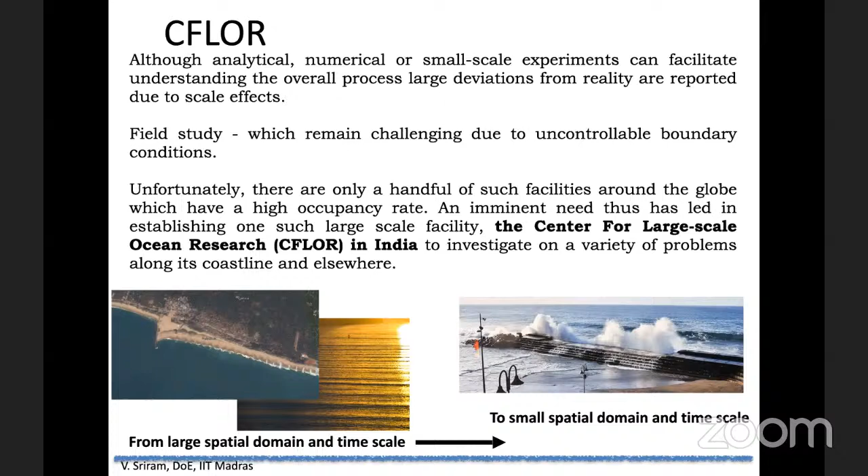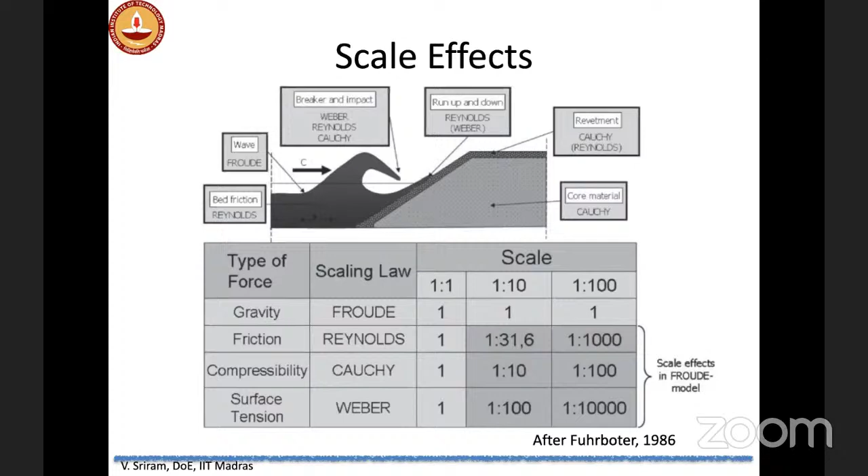So the field study is the best way, but due to uncontrollable boundary conditions we can't reproduce the entire thing. So one way is to try to have a large scale facility. Of course, one reason for going for this large scale facility is, as everybody knows, the scale effects. Whenever there is wave breaking interaction with the structure, there is going to be a scale effect because of the air, the compressed air part of it.

So as part of the Institute of Eminence from IIT Madras, we proposed a Center for Large Scale Ocean Research, wherein we want to develop a testing facility of large scale - 500 meters length, 8 meters deep, 6 meters of water depth and 5 meters wide. We formed an international research group with about 15 faculties who want to interact, and we want to generate collaborative activity along with the testing facilities.

This is the proposed testing facility which we have proposed, and we are looking for funding details from IITs. I have not included NSTL because this is only for the academic institutes which are present all over the world for industry as well as academic researchers to use. There are 5 or 6 such facilities all over the world.

We want to pitch ourselves at IIT Madras for the proposed facility with a large tank, as well as a stroke that can generate a significant wave height up to 3 meters, with the wave period from 4 to 20 seconds.

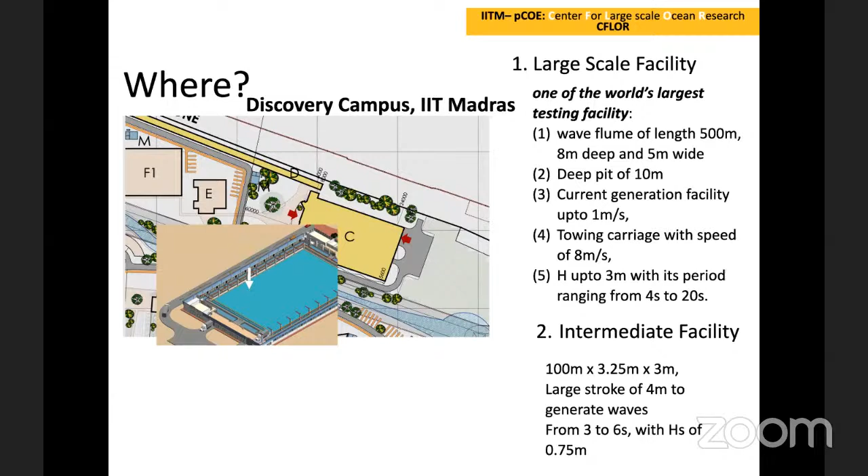That is basically based on a piston type wave maker with an 8 meter stroke. It is going to be in our Discovery campus at IIT Madras. The C is basically the existing port center, sponsored by Ministry of Shipping, as part of this tank.

We have taken a small tank out of it, which is basically an intermediate facility for the CFLOR - 100 meter length and 3.25 meter width, with a large stroke of 4 meters, which we are developing in-house. Nothing is imported. This wave basin we have developed will be commissioned in another 3 to 4 months.

We are deploying 152 wave makers, all in-house developed. Nothing is imported - the technology, the design, everything. Because of our expertise in the numerical model, we are able to develop these experimental facilities for the wave makers and everything. This is a shallow basin, mostly for port and coastal engineering.

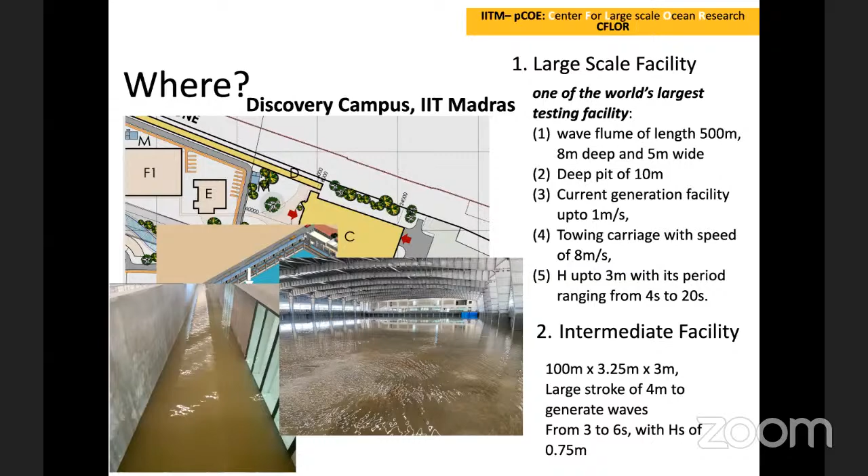Of course, you can also do maneuvering studies for shallow water. The large scale facility is part of D, shown in the top figure. The D mentioned is basically the large flume, which is a proposed one. I hope someone will take it forward from us.

In the future, we want to couple the numerical models. Our main aim is to couple, because as part of the center we are also having a ship simulator - a 360-degree ship simulator. The simulator will also be integrated with the shallow wave basin. That was one of our ideas, and we want to integrate this with our numerical model.

So is it feasible? Yes, we have proven this integration of numerical model to experimental facility way back in 2014 in a 2-dimensional facility in a large wave flume - GWK in Hanover. We proved the capability of a potential flow solver developed by IIT Madras, and how it is able to trigger the wave maker, and then reproduce the entire thing in one go. That can be done in coupling future models with experiments.

That was our aim. Finally, I would like to thank my students, who are the backbone in developing these models, as well as acknowledge many funding agencies, both DST and international funding agencies, for funding our work on development of these numerical models. Thank you.

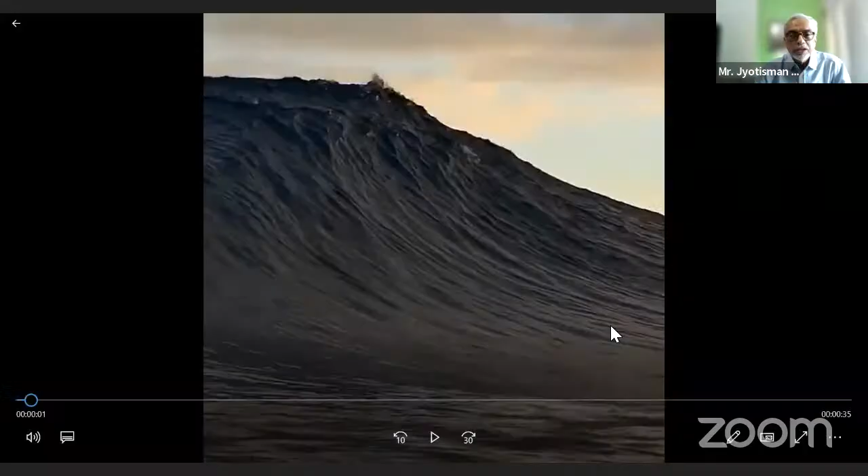And I have one more thing, if I am allowed to share the screen, I can show a very interesting wave which I luckily received today. It's really a wonderful picture of an actual ocean wave, a breaking ocean wave, especially near the shore area. I'll just show that for the benefit of everyone, and I hope you will appreciate the wonder of it. Thank you very much.

Okay, that's all. I felt that it is really a wonderful thing that Dr. Sriram is trying to model, and he has been able to model it well, based on what he showed. That's my observation, so thank you very much. I don't have any other question.